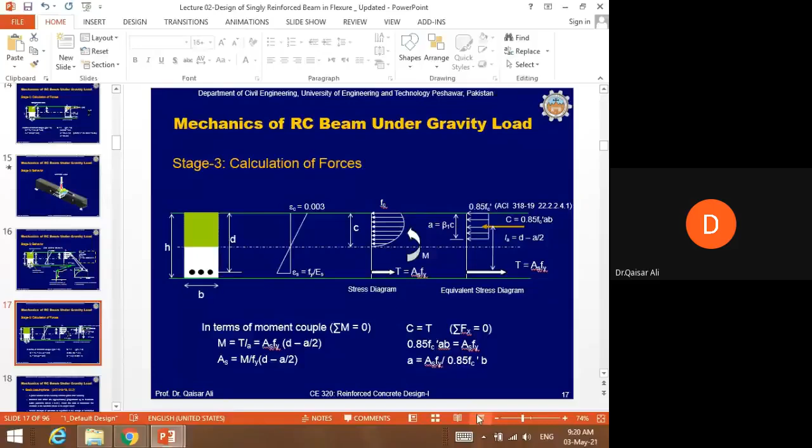the beam will be considered as failed when the strain in the extreme compression fiber reaches a value of 0.003. Do you remember this? We did the derivations on this. Yes, sir.

Okay, before discussing the design corresponding to stage 3, which is basically the strength design approach, we should discuss some basic assumptions involved in the mechanics of reinforced concrete beams. So the first assumption is that a plane section before bending remains plane after bending.

You are familiar with this assumption. When you were deriving the flexure formula in the mechanics course, you studied this assumption. And what does this mean? This assumption means that if we take a section, for example, this is a simply supported beam, and we take a section over here, this section will remain plane even after bending. The beam will bend when a load is applied, but the section will remain plane.

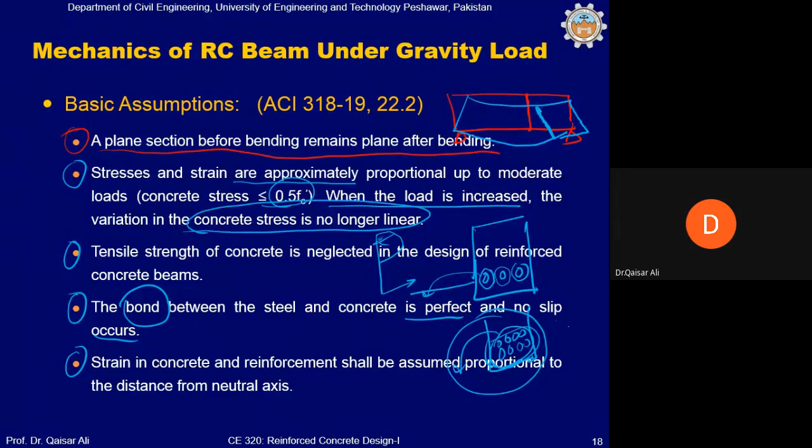Fifth assumption is that strain in concrete and reinforcement shall be assumed proportional to the distance from neutral axis. ये already हम पढ़ चुके हैं. We can see that strain is proportional to the distance from neutral axis. What does it mean? That the strain value will increase as we move away from the neutral axis. Clear? Yes, sir.

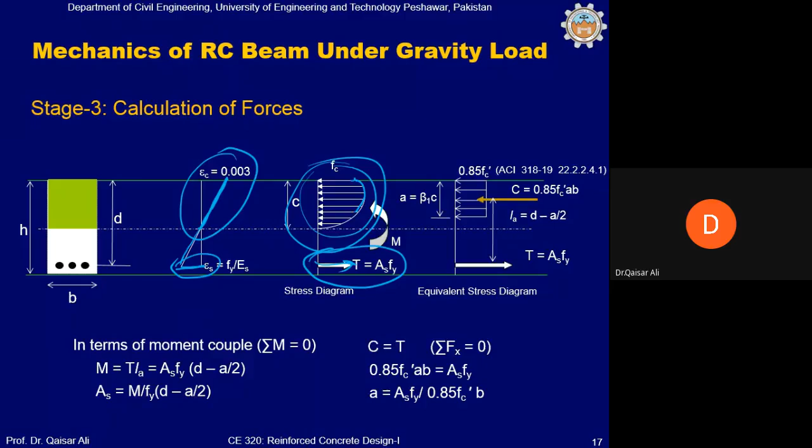और ये assumption तो हम already पढ़ चुके हैं. The maximum usable concrete compressive strain at the extreme fiber is assumed to be 0.003. ये तो बार बार हम पढ़ते हैं. So the maximum concrete strain at which we can consider that the beam is failed is 0.003. This is basically the crushing strain of concrete. So this is clear to you now that the compressive strain value will be fixed. In case of strength design, the crushing strain will always be 0.003. So this value will always be fixed.

Okay. But what about the strain in steel at the time of crushing? What about this value? Now this will depend on the amount of reinforcement. If the amount of reinforcement is relatively small, okay, so then the steel will yield well before the crushing of concrete, and in that case, at the time of crushing, the strain in the tensile steel will be greater than the yield strain. Okay. For example, for this case, the reinforcement amount is denoted by AS1.

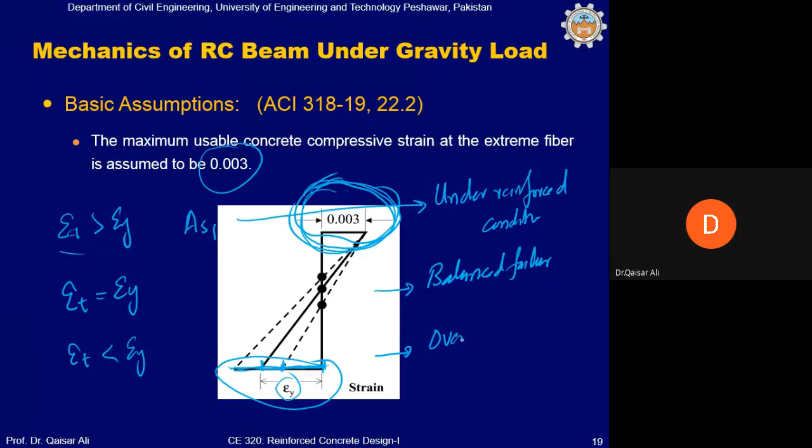If we further increase the amount of reinforcement, then the strain in steel at the time of crushing will be even less than the yield strain, which means that the concrete will crush before yielding of steel. This condition is known as over-reinforced condition, and the section is known as over-reinforced concrete section. अब बात समझ में आ रही है?

For example, the steel corresponding to balanced failure condition is denoted by AS2, and the steel corresponding to over-reinforced concrete section is denoted by AS3. So AS3 will be greater than AS2, and AS2 will be greater than AS1. इस तरह है ना?

अच्छा, अब इसमें अगर आप देखें, these two conditions, that is balanced failure condition and over reinforced condition, will lead to the brittle failure of reinforced concrete beam, because if you see first of all at the balanced failure condition, what will happen? The yielding of steel will occur simultaneously with the crushing of concrete. You will get no warning time, no enough time for escape. So this will be a brittle failure mode, because crushing of concrete is failure, and if the steel just yields at the time of crushing, it will give you no warning signs before the failure.

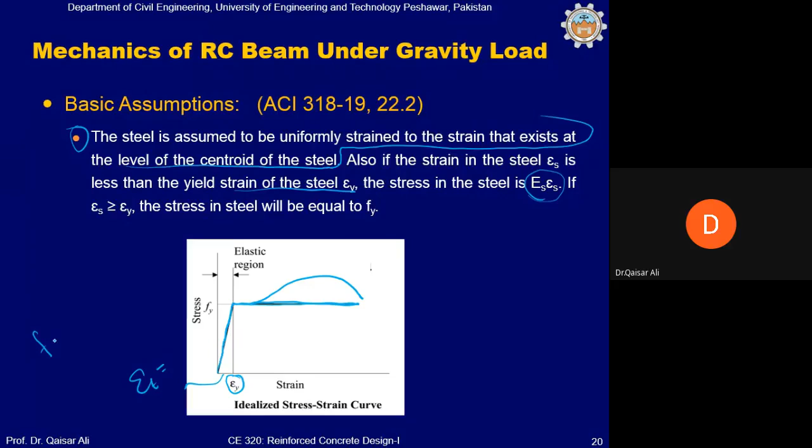This is basically the bilinear elastoplastic curve. You know that actually it will vary like this. This will be the actual stress strain curve. But we can assume the curve as elastoplastic curve, and if the strain in steel is less than the yield strain, you can calculate the stress directly from strain by multiplying this strain with elastic modulus. Clear?

And when the strain in the steel is greater than the yield strain, you can calculate the stress. So the stress in the steel will be directly, you can take it equal to Fy.

बात समझ आ रही है? ये तो ऑलरेडी हम पढ़ चुके हैं ना। Yes, sir.

अच्छा, अब यहां पर आप देखिए जरा, the steel is assumed to be uniformly strained to the strain that exists at the level of centroid. इसका क्या मतलब है? For example, this is a reinforced concrete beam. We have provided 3 bars in the first layer and 2 bars in the second layer. अच्छा, अगर आप strain diagram बनाएं तो the strain diagram will be like this. εc value तो आप लोगों को पता है, this is fixed, it will be 0.003.

Okay. The stress in layer 2 will be fs2, and the strain in layer 2 is εs2, and the strain in layer 1 is denoted by εs1. Clear? अब आप मुझे जरा बताएं, which one will be greater, εs1 or εs2?

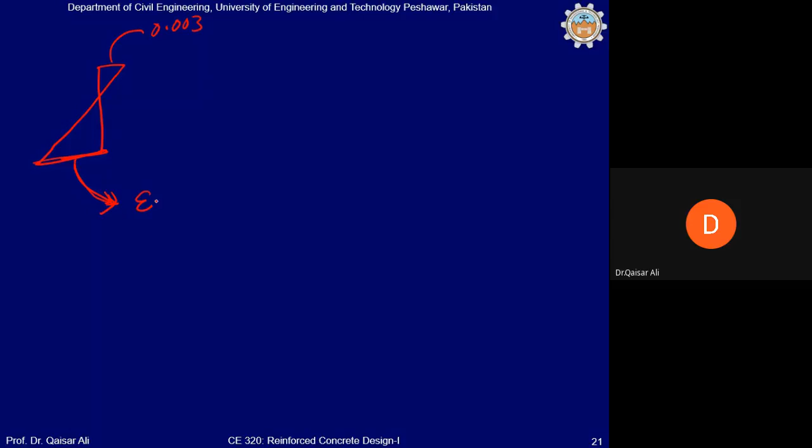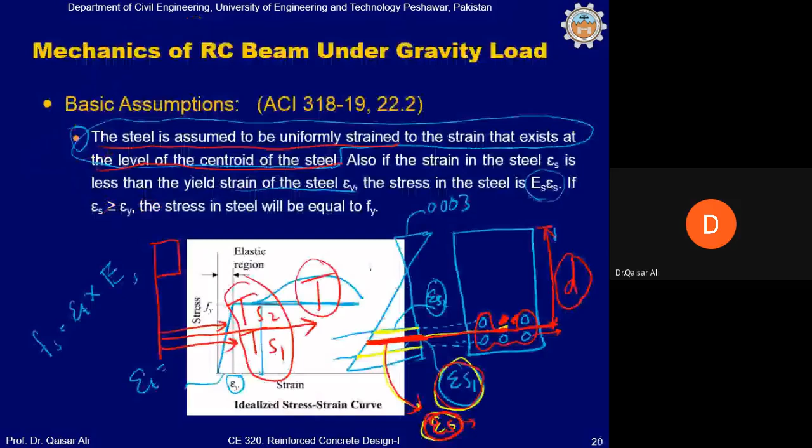And you can also qualitatively you can say that what will be the strain in the steel at the time of crushing. Tensile strain in steel, it will be greater than the yield strain or less than the yield strain. Maybe equal to the yield. Equal to the yield strain. कैसे equal to यार, मैंने तो आपको पहले ही बताया। सर ज्यादा होगा क्योंकि आप देखिए we will always design or reinforce for the under reinforced condition. Yes सर ज्यादा होगा सर. It will be more than the yield strain.

By how much ये हम आगे डिस्कस करेंगे, but this strain for a well designed beam, that is, a beam designed as per ACI code, the strain in the steel will always be greater than the yield strain, because this is the under reinforced condition and this is the design. This section will lead to the ductile failure mode. Okay.

अच्छा, ये कितना होना चाहिए? How much should be the strain in the steel at the time of crushing? So ACI provides a limit on this strain, and corresponding to that strain you can calculate the reinforcement, which will be basically the maximum amount of reinforcement to be provided in a beam. Clear? And you will always provide reinforcement less than the maximum reinforcement.

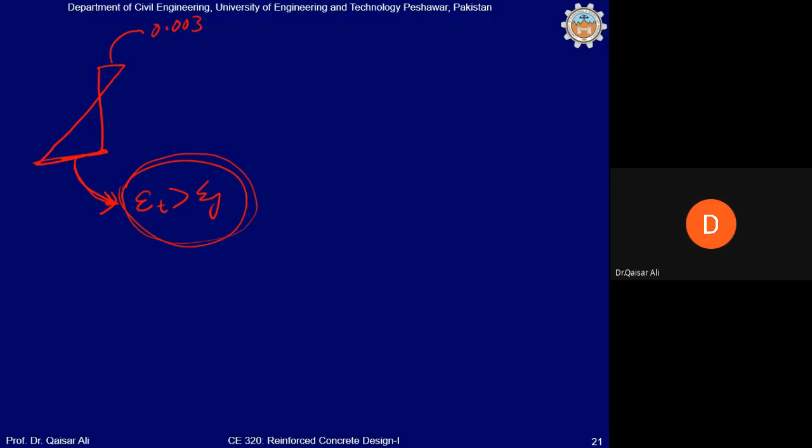So ACI code says that, for example, this is a beam. This is a reinforced concrete beam. This is the strain diagram. This value is fixed. This is 0.003. And what about this value? That is strain in the steel. We qualitatively know that this will be greater than EY for under reinforced condition. This is C. Now, since this strain depends on the amount of reinforcement, is that right? नहीं?

So therefore ACI calculates the maximum reinforcement by limiting the strain in the steel. And code says that this strain at the time of crushing shall be greater than or equal to the yield strain of steel plus 0.003. समझ में आ रही बात? इसका क्या मतलब है? इसका मतलब ये है that at the time of crushing the steel would have yielded and the strain in steel will be more than the yield strain. Clear? By 0.003 it will be greater than the yield strain. बात समझ में आ रही है?

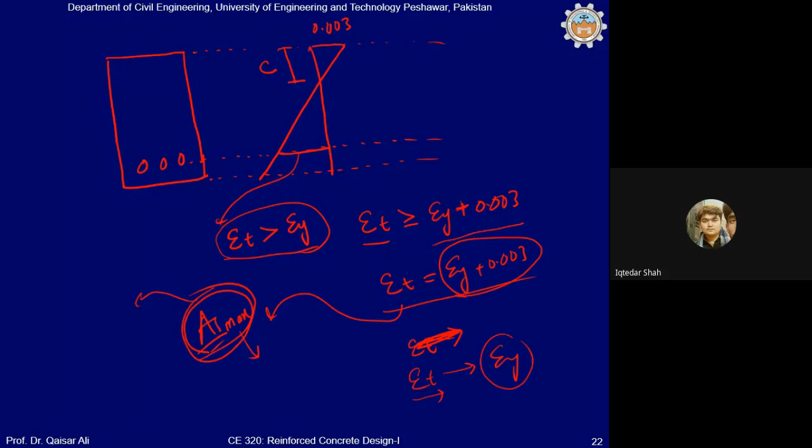तो इसका मतलब ये कि आप रिइंफोर्समेंट बहुत ज़्यादा नहीं बढ़ा सकते, यानी आप रिइंफोर्समेंट बढ़ाएंगे तो आप कैपेसिटी तो ठीक है इंक्रीज होगी, but the failure will be converted from ductile failure mode to the brittle failure mode. So you cannot increase always the capacity by increasing the reinforcement in the beam. अगर आपको ज़्यादा capacity चाहिए, for example, तो you can increase the capacity by increasing the depth of beam. Clear? Yes, sir. ज़रूरी नहीं कि आप reinforcement से ही capacity बढ़ाए, सही?

अच्छा, corresponding to this strain, for example, अगर हम reinforcement कैलकुलेट करना चाहें, that is very simple. This is the stress diagram. This is the compressive force and tensile force. First of all, you will calculate the C value, the small c value, which is the depth of neutral axis. So you can calculate that very easily from similarity of triangle. It will be equal to 0.003 divided by C.

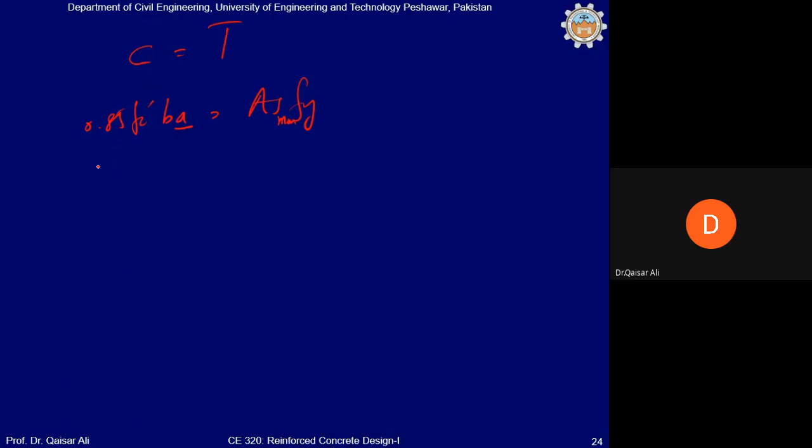0.85 f'c β1 into 0.34d, it will be equal to As max into Fy. This is corresponding to grade 40. Clear? अच्छा, अब इसको जरा कैलकुलेट करें. As max will be equal to, इन दोनों को आप मल्टीप्लाई करें और मुझे वैल्यू बताएं. 0.34 मल्टीप्लाई बाय 0.85, 0.29.

So almost equal to 0.3 into f'c divided by Fy into bd. So this is the maximum amount of reinforcement which is allowed in a reinforced concrete beam for grade 40 steel. Clear?

क्लियर? अच्छा, अगर हम यहाँ पर ग्रेड 60 की करस्पॉन्डिंग अगर हम कैलकुलेट करें, तो यहाँ पर फिर हम ये पुट करेंगे 0.31d. यहाँ पर हमने कैलकुलेट किया है, it is 0.31d. तो यहाँ पर हम 0.31d अगर हम पुट करें, तो As max will be equal to, ये जरा मुझे बताएं, 0.31 मल्टीप्लाइड बाय 0.85, 0.26. 0.27 almost into f'c divided by Fy into bd. This is the maximum reinforcement corresponding to grade 40, and this is maximum reinforcement for grade 60 steel.

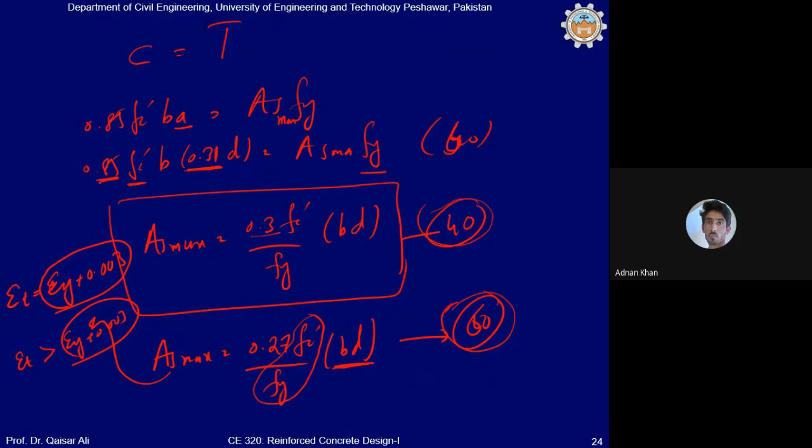एक्सक्यूज मी सर। जी जी सर ये तो मैक्सिमम लिमिट है ना, और मिनिमम लिमिट कितना होगा? मिनिमम लिमिट की तरफ आते हैं ना, पहले ये तो समझ गए ना, जी सर, दैट्स क्लियर। जो हम कर रहे हैं उस पर ज्यादा फोकस करें ना, जो आगे हम करेंगे ना, what will be the minimum reinforcement. अगर ये समझ गए कि नहीं? Yes, sir. समझ गया। Clear.

So for specified material properties and for a given section of beam, you can calculate the maximum amount of reinforcement. अच्छा, इससे आप reinforcement ratio भी calculate कर सकते हैं, और वो किस तरह, यानी आप इस bd पर इसको डिवाइड करें। यहाँ पर जरा देखें, this is As max is equal to 0.27 f'c divided by Fy into bd. क्लियर? अच्छा, इसको अगर हम दोनों साइड्स को bd पर डिवाइड करें तो ये तो कैंसिल हो जाएगा.

This is known as reinforcement ratio. This is basically the area of reinforcement, area of steel divided by effective area of concrete. This is denoted by rho. So area of steel divided by effective area of concrete, this is known as rho. It is basically reinforcement ratio. And maximum reinforcement divided by bd, it will be denoted by rho max, and it will be equal to 0.27 f'c divided by Fy.

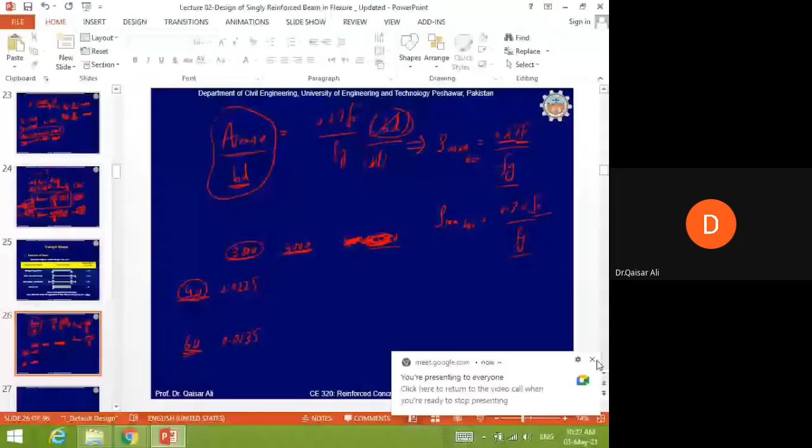आप लोगों को आवाज आ रही है? यस सर अभी आ रही है। ओके, तो आप इसी तरीके से एक टेबल बना सकते हैं और स्क्रीन नजर आ रही है कि नहीं? नो सर, नहीं आ रही सर। अच्छा, मैं दोबारा शेयर कर देता हूँ। नहीं सर विजिबल है सर। अब मेरे ख्याल में अभी इसमें कोई मसला है। सर 10 मिनट का ब्रेक लेते हैं। बस ये कंक्लूड करते हैं, फिर ब्रेक करते हैं। अभी स्लाइड आपको नजर आ रही है कि नहीं? यस सर।

Can you see the slides? अच्छा, इसी तरीके से आप ग्रेड 40 स्टील और 3000 PSI करस्पॉन्डिंग भी रिइंफोर्समेंट रेशो कैलकुलेट कर सकते हैं। मुझे क्विकली बताएं। 0.3 मल्टीप्लाइड बाय 3 डिवाइड बाय 40, what will be the value? 0.0225. And what about for grade 60 and 3000 PSI? 0.0135. तो इसका मतलब ये है at least you should remember these two values because frequently we will be using

3000 PSI and grade 40 or 60 steel in the design of beams. So you should at least remember these values. This is basically 2.25% of the, अगर आप इससे मैक्सिमम reinforcement कैलकुलेट करना चाहते हैं तो you have to multiply this value with BD. क्योंकि ये रेशो है ना। तो 2.25% of BD.

So you cannot provide more than 2.25% of the effective area of concrete beam for grade 40 steel. अगर इसको आप grade 60 के लिए करें तो it is coming 1.35% of the effective area of concrete beam. Clear? At least you should remember these values. For grade 40 steel, 3000 PSI concrete, you cannot put reinforcement more than 2.25% of the effective area. And for grade 60 steel, this limit is 1.35%. क्लियर?

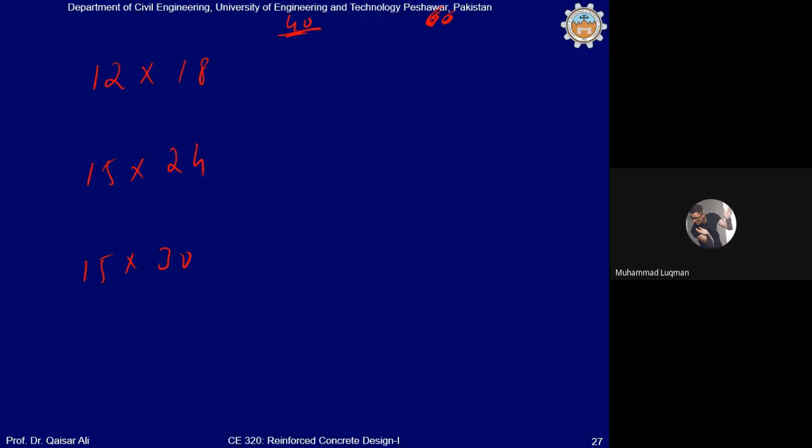सर बस इस एरिया को उस परसेंटेज के साथ मल्टीप्लाई कर लेंगे, 2.25 या 1.35। इस एरिया के साथ नहीं मल्टीप्लाई करेंगे ना यार, b और d के साथ, यानी इफेक्टिव एरिया। इफेक्टिव डेप्थ यूज करेंगे। हाँ, तो फॉर ग्रेड 40 इट विल बी इक्वल टू 0.0225 मल्टीप्लाइड बाई 12 मल्टीप्लाइड बाई 18 माइनस 2.5, तो इट विल बी इक्वल टू 15.5। क्लियर?

और इसी तरह ग्रेड 60 के लिए आप कैलकुलेट कर सकते हैं: 0.0135 मल्टीप्लाइड बाई 12 मल्टीप्लाइड बाई 15.5। बात समझ आ रही है? तो इसी तरीके से हर एक डिफरेंट साइज ऑफ बीम्स के लिए आप मैक्सिमम रिइंफोर्समेंट करस्पॉन्डिंग टू ग्रेड 40 एंड 60 कैलकुलेट कर सकते हैं। ये पॉइंट समझ गए कि नहीं? यस सर।

तो ये जो मैक्सिमम रिइंफोर्समेंट की लिमिट है बाय एसीआई कोड, ये बेसिकली किसके लिए? दिस इज डक्टिलिटी रिक्वायरमेंट। क्लियर? If you provide less than the maximum reinforcement, so it will ensure a ductile failure mode.

It will ensure that the failure mode will be ductile. Clear? Because the steel would have yielded well before crushing when the reinforcement provided in the beam is less than the maximum reinforcement. Clear?

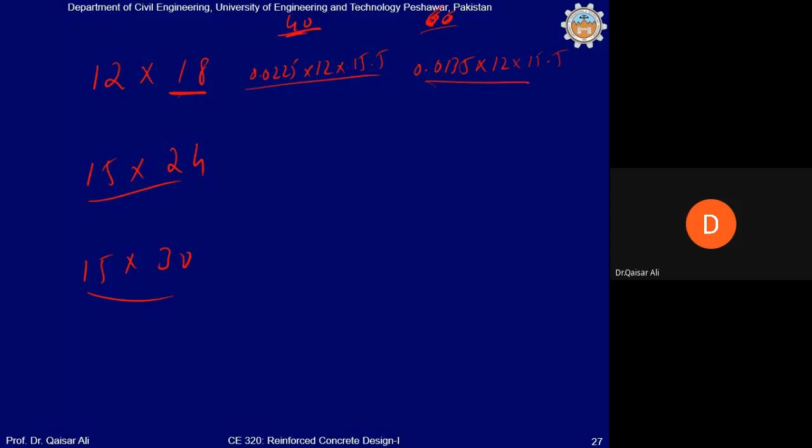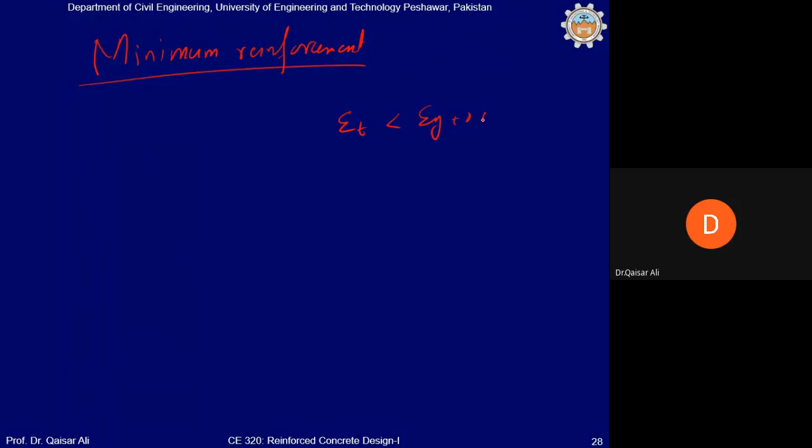Acha. There is also another requirement of ACI code, another limit, which is the minimum reinforcement limit. The more we increase the reinforcement, you know that the strain will become less than εy plus 0.003. The less reinforcement we provide, the more ductile the failure will be, because the strain value of the tensile reinforcement at the time of crushing will be greater the more we reduce the reinforcement.

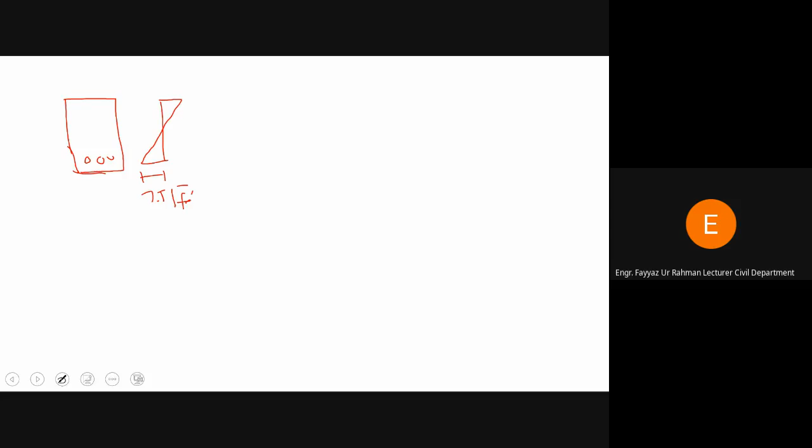Okay, so we already started that why we provide the minimum reinforcement in a beam. So this is the stress diagram just before the cracking of concrete. You know this value will be equal to 7.5 under root fc prime. Okay, so the average stress multiplied by the area on which these stresses are acting will give you the tensile force resisted by the concrete. It will be equal to 7.5 under root fc prime into BH divided by 4. Is this clear?

Is it clear up to here? Yes sir. Okay, now you also read in the assumptions that we assume that just after the cracking all the tensile stresses will be resisted by the steel. There will be no contribution of concrete in resisting the tensile stresses. In other words, we will ignore completely the tensile strength of concrete. Clear? Just after the cracking. Is it clear up to here or not?

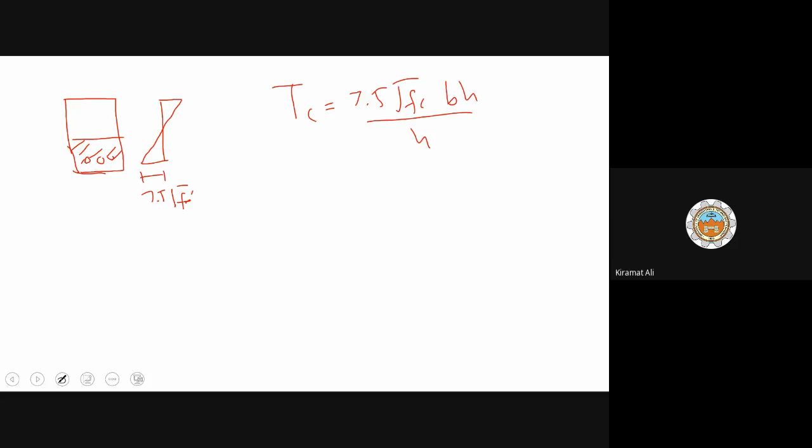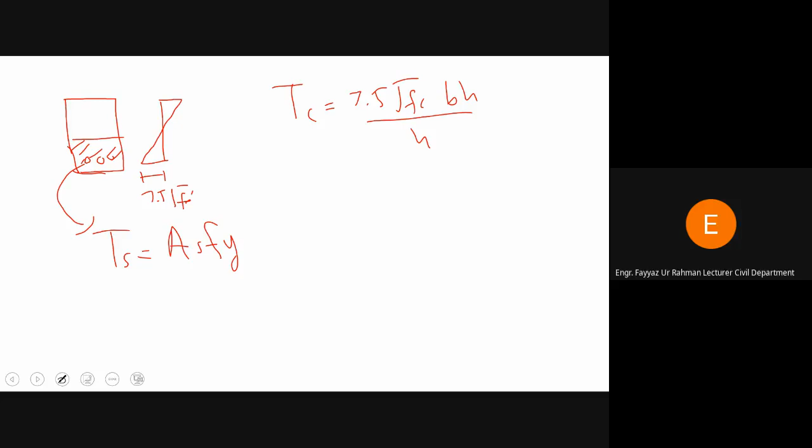Yes sir. Okay, so for the reinforcement that you have provided here, if we calculate its capacity, it will be equal to area of steel multiplied by the yield strength of the steel. Clear up to here? Now you know that after the cracking this tensile force will be resisted by the steel. Now clear? So if we equate these two, As fy must be at least equal to 7.5 under root fc prime BH divided by 4.

Okay. Now if this is equal to this one, this will basically be your minimum reinforcement, the minimum reinforcement required to resist this force. And this much reinforcement should be there at the least, so that after the crack it can resist this much force which was there in the concrete before the cracking. Is this clear? Please respond. Yes sir.

Now let's calculate this. As minimum will be equal to 7.5 under root fc prime BH divided by 4 fy. 7.5 divided by 4, tell me this value. 1.875. So As minimum will be equal to 1.875 into under root fc prime divided by fy into BH. If we replace this H with the effective depth d, because in reinforced concrete design we will always use the effective depth, since H is always greater than the effective depth, you can take it equal to 1.25 d. So put this here.

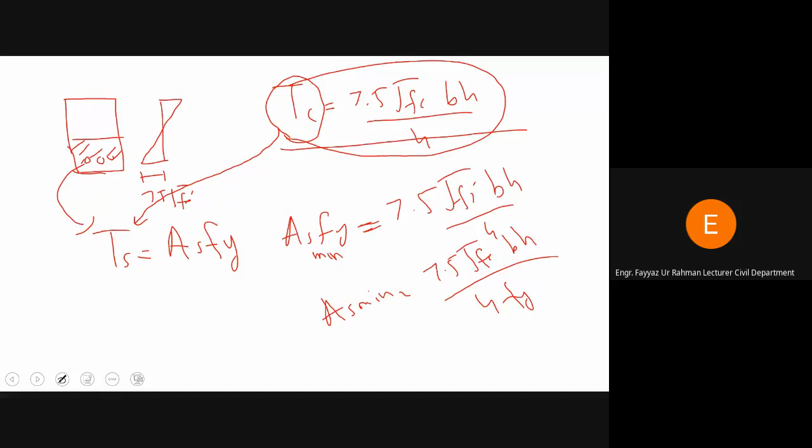Yes, sir. So this is how minimum reinforcement is calculated. But code says that as per code the minimum reinforcement will be 3 under root fc prime, which we have developed, divided by fy, and this must be greater than or equal to, there is another limit, 200 divided by fy into bd. क्लियर? इसका क्या मतलब है? इसका मतलब ये कि आप ये दोनों वैल्यूज कैलकुलेट करेंगे, whichever is greater that will be your minimum reinforcement.

अब बात समझ में आ रही है? Yes, sir. तो मिनिमम reinforcement रेशियो भी इसी तरीके से आप कैलकुलेट कर सकते हैं. ये दोनों अगर आप बीडी पर डिवाइड करें दोनों साइड्स, so this will give you the minimum reinforcement ratio, and minimum reinforcement ratio will be equal to 3 under root fc prime divided by fy greater or equal to 200 divided by fy. For different concrete strength and grade of steel, you can calculate the minimum reinforcement ratios. Clear?

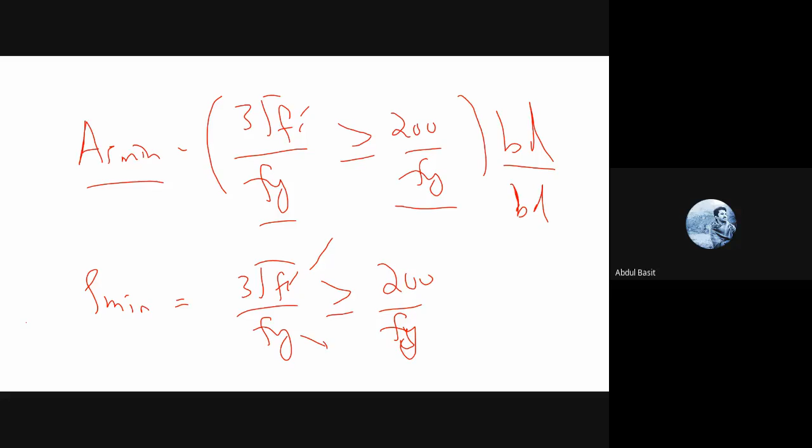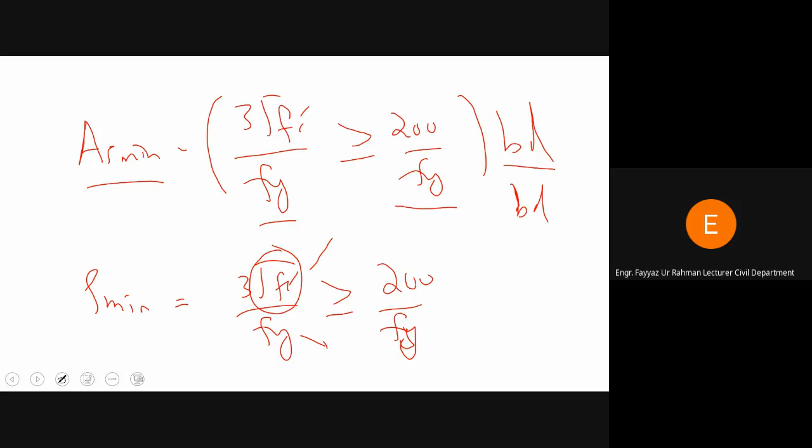ये आप लोग तो मैथ्स में काफी कमजोर है यार. सिंपल कैलकुलेशंस आप नहीं कर सकते. मैं आप लोगों को बार बार बता रहा हूं कि व्हेनेवर एफसी प्राइम कम्स इन स्क्वायर रूट, तो फिर आपकी यूनिट्स क्या होगी? PSI सर, हमने PSI में. तो ये आप PSI में पुट करें ना यार. ये भी PSI में पुट करें, FY भी PSI में पुट करें. इसी तरीके से यहाँ पर भी आप ये PSI में पुट करें. सही?

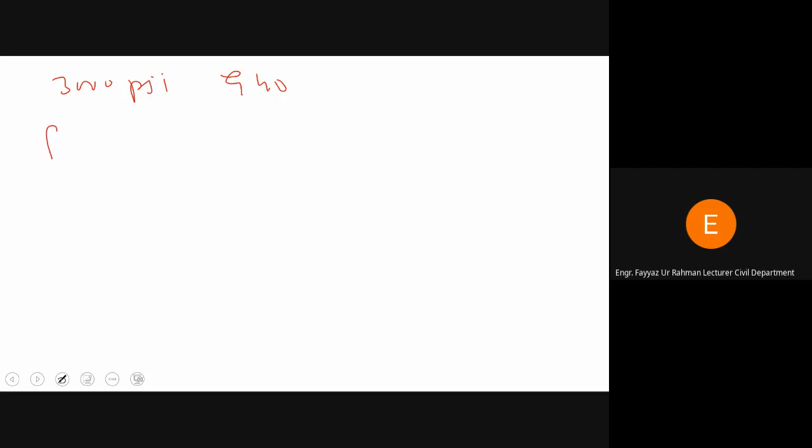अब वैल्यू बताए शाबाश, क्विकली. 4.108. इतने आसान कैलकुलेशंस आप नहीं कर सकते यार। 4.1 into e power minus 3 सर यही आ रहा है। ये आप इस तरह बताए ना 4.1, तो आप पूरी वैल्यू बताए ना, ये 0.00 क्या आता है? 0.0041 ये corresponding to this equation सर. 0.0041, and what about this equation? 0.005. 0.005. Okay, so minimum will be 0.005 which one will be governing? 0.005.

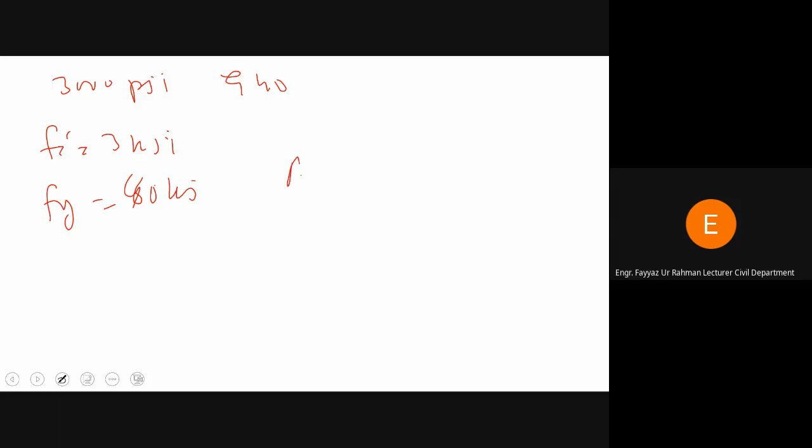तो इसका मतलब ये कि 3000 psi for fc prime is equal to 3 ksi and fy is equal to 40 ksi. The minimum reinforcement ratio will be basically 0.5% of the effective area. 0.5% means 0.005 into BD. इस तरह है ना?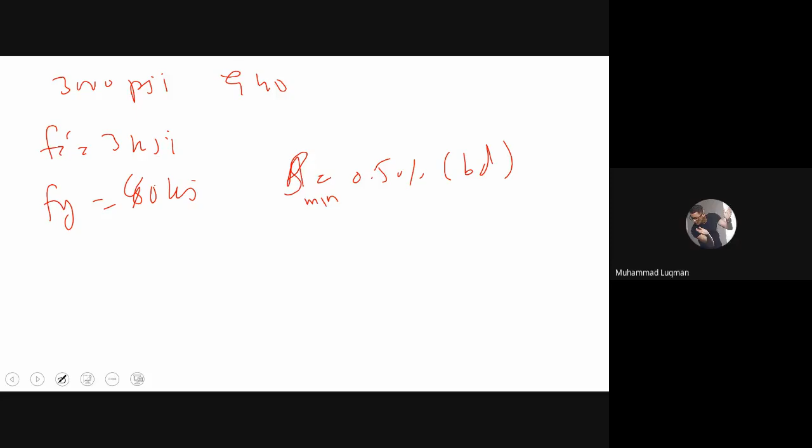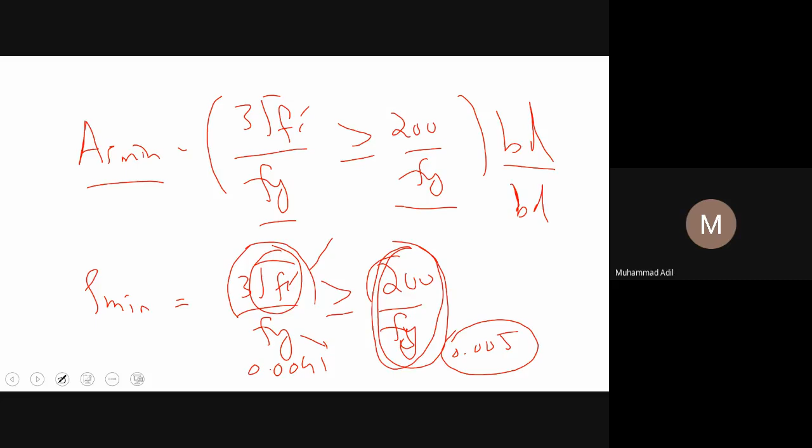Yes, sir. इसी तरीके से आप 3000 psi और ग्रेड 60 करस्पॉन्डिंग भी कैलकुलेट कर सकते हैं। ये जरा बताएं शाबाश। इसमें भी यही इक्वेशन गवर्न करेगा और ये मैंने आपको लास्ट क्लास में बताया था। Why this equation will govern? ये आप सर फर्स्ट वन से 0.0027 और दूसरे से 0.0033 तो कौन सा गवर्न कर रहा है? सर द सेकंड वन, सेकंड वन। तो ये ऑलमोस्ट 0.33% ऑफ BD।

So you should at least remember these values. For 3 KSI and grade 40 steel, the minimum reinforcement is 0.5% of BD, and the minimum reinforcement for grade 60 is 0.33% of BD. Clear? यस सर और ये मैंने आप लोगों को ऑलरेडी बताया था कि up to 4500 psi always this second equation will govern. और ये किस तरह आप कैलकुलेट कर सकते हैं?

आप ये दोनों इक्वेट करें, 3 under root fc prime is equal to 200, इससे आप fc prime की वैल्यू कैलकुलेट कर सकते हैं। आपके पास ऑलमोस्ट 4500 psi आएगा। क्लियर? इसका क्या मतलब है?

इसका मतलब ये है कि if the concrete strength is less than 4500 psi, then equation 2, 200 divided by fy, will govern. And if the concrete strength is greater than 4500 psi, then equation 1, that is 3 under root fc prime divided by fy, will govern. But since we are always using concrete strength less than 4500 psi in beams, always the second equation will govern. Academic purpose के लिए तो आप दोनों कैलकुलेट करेंगे, यानी अगर आप एग्जाम में क्वेश्चन हल करते हैं, बट ये आपको मालूम होना चाहिए कि this second one will basically give you

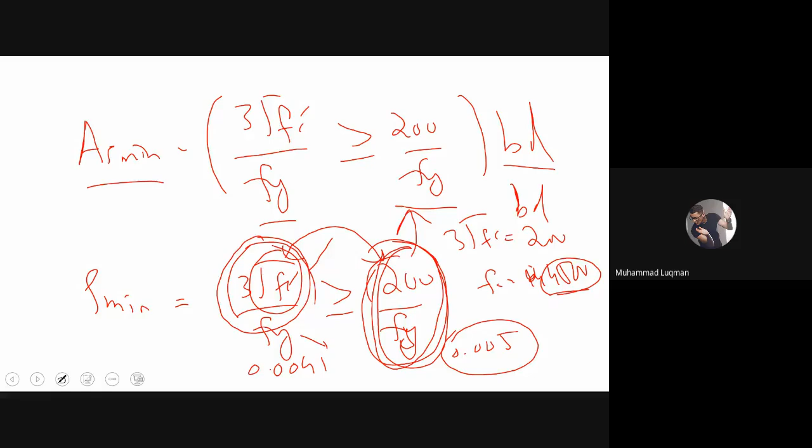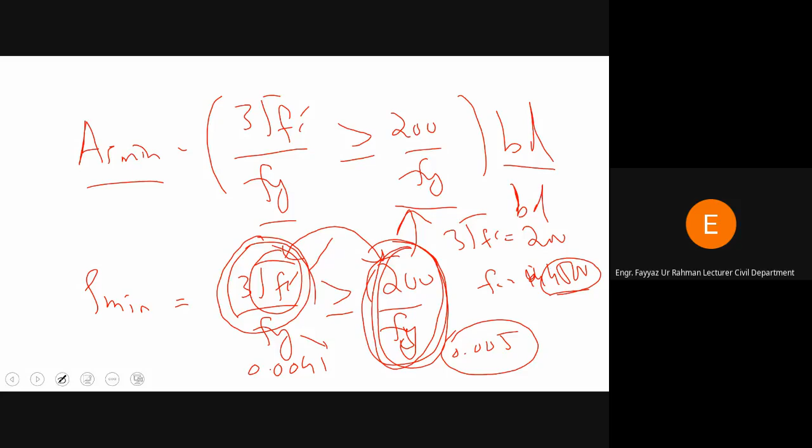this will give you the minimum reinforcement. Clear? Sir means maximum of both equations. हाँ बिल्कुल, maximum of these two will give you the minimum reinforcement.

तो फाइनली आप लोगों को कम से कम ये वैल्यूज याद होने चाहिए। बाकी तो आपके पास इक्वेशंस हैं, मगर कम से कम ये वैल्यूज आपको याद होने चाहिए that for grade 40 steel, for concrete strength of 3000 psi, fc prime is equal to 3 ksi, for grade 40, the minimum reinforcement will be 0.5% of BD and maximum reinforcement is 2.25% of BD.

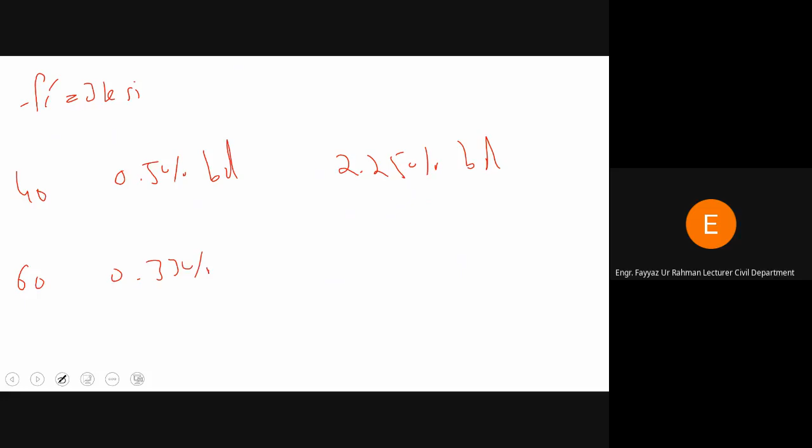इसी तरीके से grade 60 के लिए minimum reinforcement will be 0.33% of BD and maximum reinforcement is, it was how much? Do you remember? आवाज आ रही है? Sir, 1.35%. 1.35% of BD.

तो बाकी इक्वेशंस तो आप लोगों को पता है, आप उससे कैलकुलेट कर सकते हैं, मगर ये आप लोगों को कम से कम याद होने चाहिए, बिकॉज वी विल बी फ्रीक्वेंटली यूजिंग concrete strength of 3 ksi and grade 40 or 60 steel in the design of beams. Clear? चलो एक ब्रेक करते हैं, फिर after the break we will solve a design example on this. Clear?

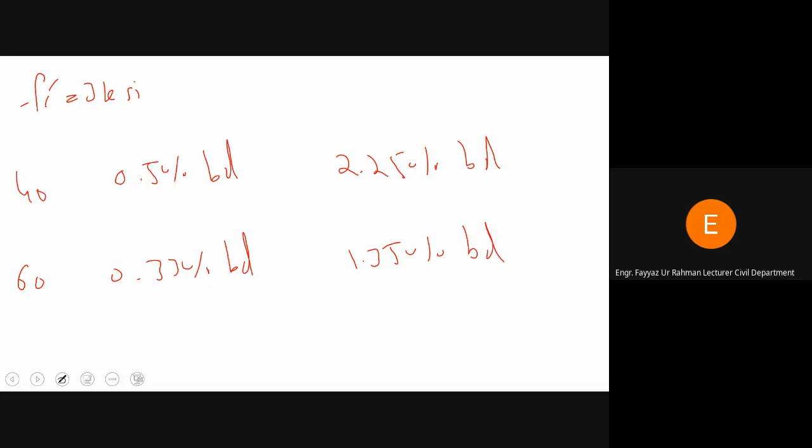Okay, ओके sir. 15 मिनट्स का ब्रेक करते हैं, सही? Okay, sir. आदिल भाई ये ग्रेड 60 के लिए मैक्सिमम रेनफोर्समेंट कितने परसेंट है? 1.35%। यस

Can you see the slides? Yes, sir. Okay, I think we should start the lecture. So we will solve the same design example using the strength design approach.

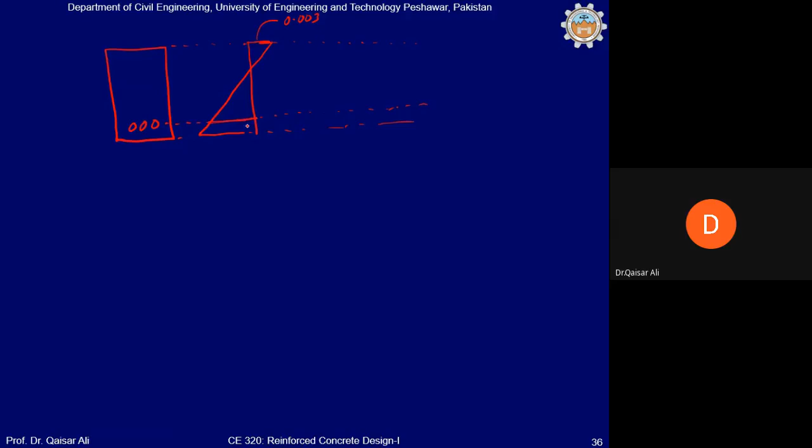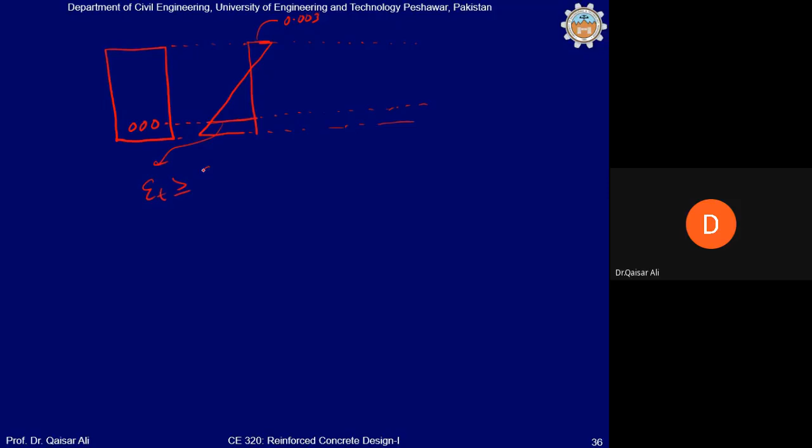This is a reinforced concrete section. In the strength design approach, you know that the compressive strain in the extreme compression fiber will be 0.003. And strain in steel will be greater or equal to εy plus 0.003. It will depend on the demand. If we draw the stress diagram, it will be like this. Because we know that the steel would have already yielded at this stage, so we know the value of Fy.

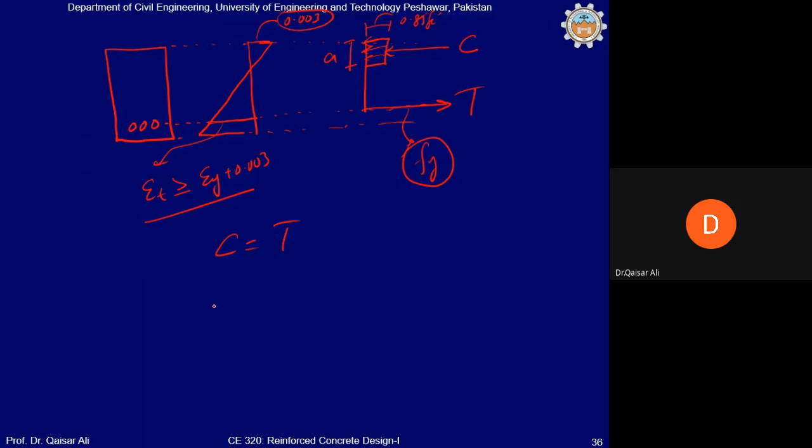So at the ultimate stage, you know the strain in the compression fiber, which is 0.003, and the stress in the steel is also known to you, which is Fy. The compressive force you can calculate from the compression block depth. The stresses are uniform, 0.85 Fc prime, and depth of the compression block is denoted by a. So this we have already studied that from equilibrium C will be equal to T. C is equal to 0.85 Fc prime b a and T is equal to As Fy.

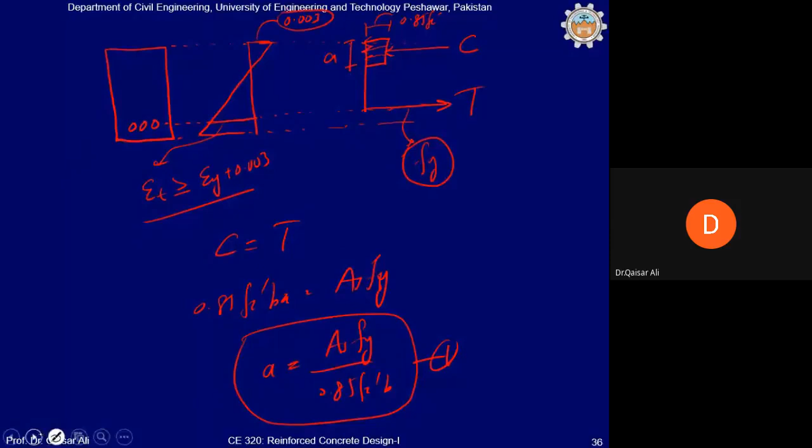And from this we have developed a relation for the compression block depth, which was equal to a = As Fy divided by 0.85 Fc prime times b. This is how you can calculate the depth of compression block for a given size of beam with given reinforcement. Okay.

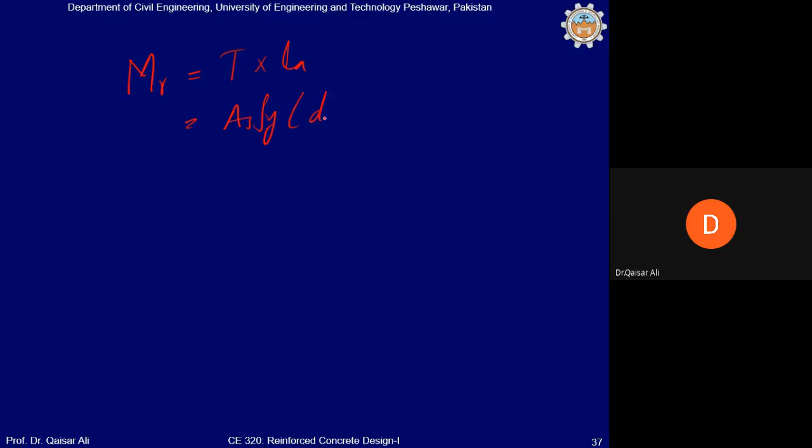Then we also calculated the flexure capacity at this stage, which was equal to T multiplied by lever arm, which was equal to As Fy, and lever arm is equal to d minus a by 2. Now in strength design approach, this MR is denoted by Mn, which is basically nominal capacity of a reinforced concrete beam, which is based on the specified material properties. Clear? So this nominal capacity is equal to As Fy into d minus a by 2.

But since you know that in case of strength design approach, we have studied in lecture 1 that the demand will be amplified, that is the load will be multiplied with corresponding load factors, and the capacities will be reduced. So this nominal capacity will be reduced by strength reduction factor, that is phi Mn. And this phi Mn is basically the design flexure capacity. If we multiply this Mn with the strength reduction factor phi, then it becomes the design flexure capacity. Okay.

Now, to avoid failure, the capacity shall be greater than or equal to the demand, and the demand you can calculate from the analysis. For a given load, you can calculate very easily the demand moment from the moment diagram. But for calculation purpose, you can take this phi Mn equal to Mu. Why? Because the factor of safety has already been incorporated in this equation.

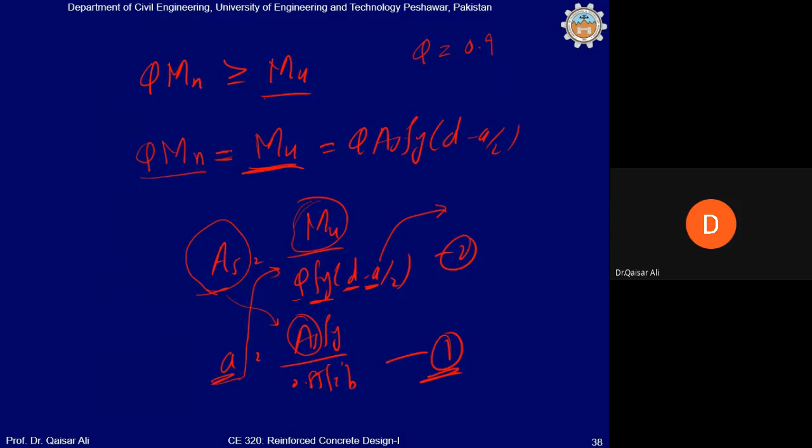We have already discussed this, clear? Yes, sir.

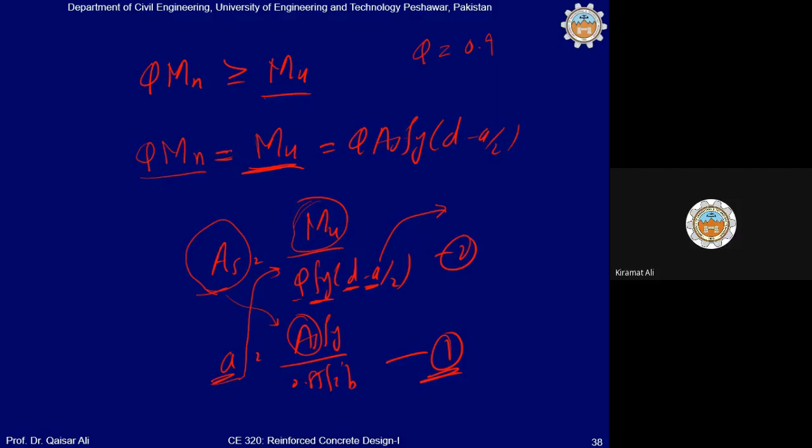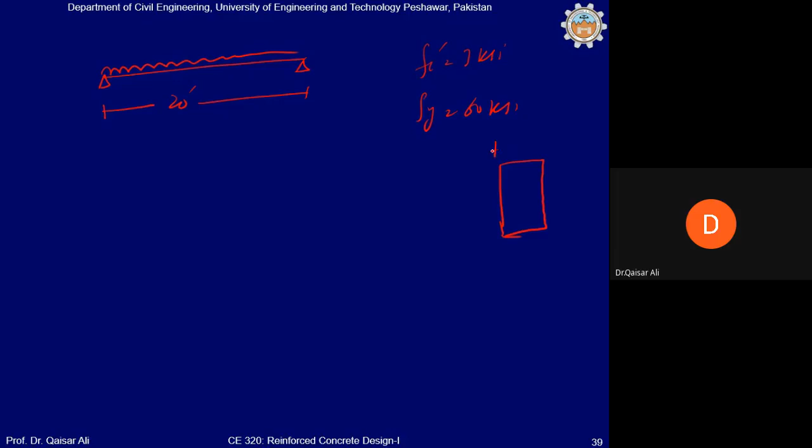Okay, now we come to the design example. If you remember, this was a simply supported beam. The span length is 20 feet. f'c is 3 ksi and fy is 60 ksi. You can assume the beam size. If you remember our working stress approach, we assumed that the size of beam is 12 inch by 18 inch. However, you can select the size of beam, especially the depth of beam, from the ACI table.

Calculate this quickly, well done. 15, sir. 15 inches. But since this is the minimum value, you can provide a depth greater than this, but you will never provide a beam depth less than this value. Clear? That is why we selected the beam size equal to 12 by 18 inch. Is this understood now?

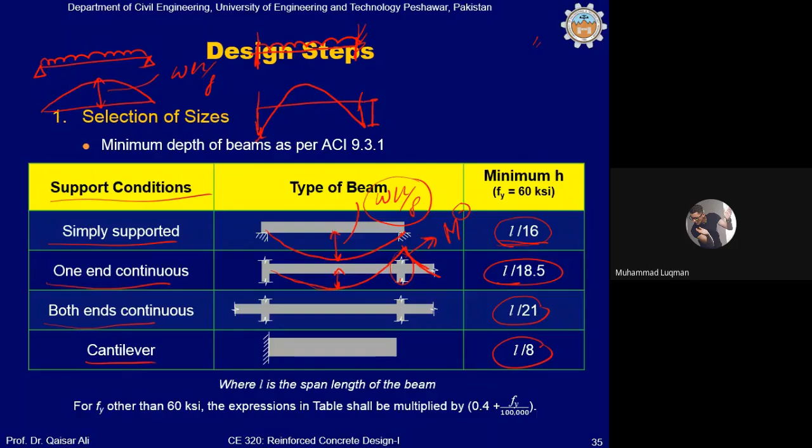ये मोमेंट कितना होगा? नेगेटिव मोमेंट फॉर फिक्स सपोर्टेड बीम सब्जेक्टेड टू यूनिफॉर्मली डिस्ट्रीब्यूटेड लोडिंग. Sir, WL square divided by 4. WL square by 12. Okay. Yes, sir.

But this total moment will remain the same. It is just distributed between positive and negative moment. This total moment will remain the same. It will be WL square by 8. If you subtract WL square by 12 from WL square by 8, you will get the positive moment at the center of fixed supported beam. ये अगर आप कैलकुलेट करें, so it will be, I think, WL square by 24.

अब बात समझ आ रही कि नहीं? तो total moment will remain same. It will be WL square by 8. It will be just distributed between negative and positive moments. तो यहाँ पर अगर आप देखें तो

for simply supported beam, the maximum moment will be WL square by 8. For one end continuous, of course, negative moment will be produced at the support. So this will be divided between negative and positive moment. So this value will be reduced. तो आप देख सकते हैं, you can also reduce the depth correspondingly. यहाँ पर L by 16 है और यहाँ पर L by 18.5 है. ये पॉइंट अब समझ में आ रही है? यस सर।

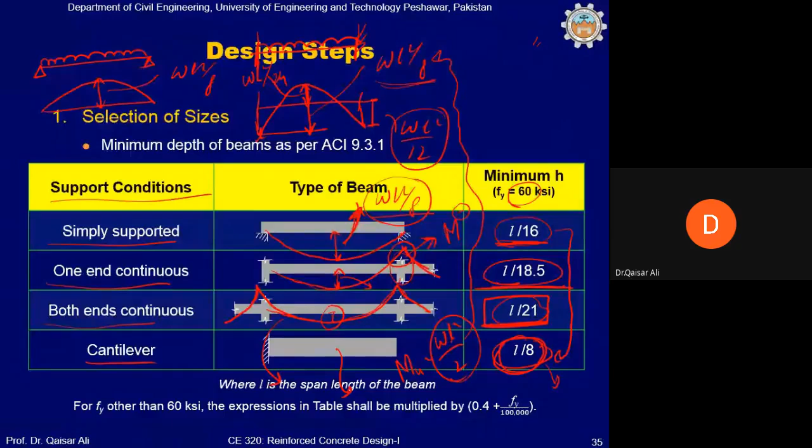तो Yes, sir. Using the ACI table, you can calculate the minimum depth of beam. But remember, this table is applicable for normal weight concrete and grade 60 steel. This is developed basically for normal weight concrete and the grade of steel is 60. Clear? For any other grade of steel or for lightweight concrete, you will apply modification factor to these equations. Clear? Yes, sir.

For example, for any other grade of steel, you will multiply these values with this factor: 0.4 plus Fy divided by 100,000, where Fy will be in psi. For example, if you are using grade 40 steel, so what will be this factor? 0.4 plus 40,000 divided by 100,000. So it will be equal to 0.4 plus 0.4. So you have to multiply all these values with 0.8 for grade 40 steel. ये बात क्लियर है? So for any other grade of steel, you will basically modify these equations by this factor.

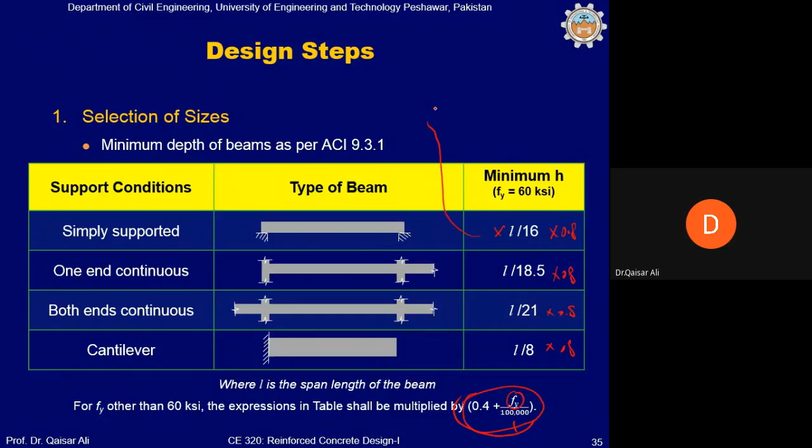Similarly, for lightweight concrete, you can modify this equation by multiplying this equation with a lightweight factor, which is basically 1.65 minus 0.005 into weight of concrete, or 1.09, whichever is greater. ये WC क्या है? This is basically unit weight of concrete. So normally the unit weight of concrete is 150. For plain concrete, it is 145. But for lightweight concrete, this will be less than 145. For example, WC is 100 pound per foot cube.

तो उस केस में फिर आप यहाँ पर ये पुट करेंगे, तो it will be equal to 1.65 minus 0.5, 1.15. तो ये 1.15 आप इसके साथ मल्टीप्लाई करेंगे. बात समझ में आ रही है? एंड रिजल्ट इसका क्या होगा? दिस द डिप्थ विल बी इंक्रीज्ड बेसिकली.

अगर बहुत ज्यादा लाइट वेट कंक्रीट नहीं है, like for example if the unit weight of concrete is more than 115 pounds per foot cube, फिर उसके लिए इस मॉडिफिकेशन फैक्टर की कोई जरूरत नहीं है, because it will give you a value closer to 1. So this table is basically developed for grade 60 steel, for normal weight concrete and grade 60 steel. For lightweight concrete or for any other grade of steel, you will basically modify these equations with corresponding modification factors. Clear?

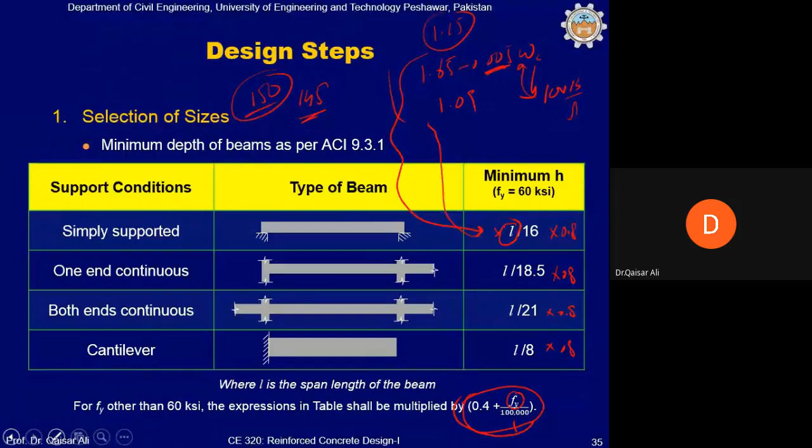अच्छा, अब दोबारा यहाँ पर आते हैं. The minimum depth required from ACI table is 15 inches, so I can choose greater than that depth. So in my case, it is 12 by 18 inches. Clear? And if you remember, the dead load was equal to 1.5 kip per foot, and the live load is equal to 0.5 kip per foot. And we are assuming that this load also contains the self weight of the beam.

अगर आपको given हो that the self weight is not included, तो फिर आपने इसके साथ ही self weight भी include करनी है, because self weight is also a dead load. तो किस तरह आप कैलकुलेट करेंगे? Very simple. Area of the cross section 12 by 18, और इसको कन्वर्ट करें फुट स्क्वायर में, तो डिवाइड बाई 144 एंड मल्टीप्लाई बाई यूनिट वेट विच इज 0.15. So from this you can calculate the self weight of the beam. You will basically add this with the dead load.

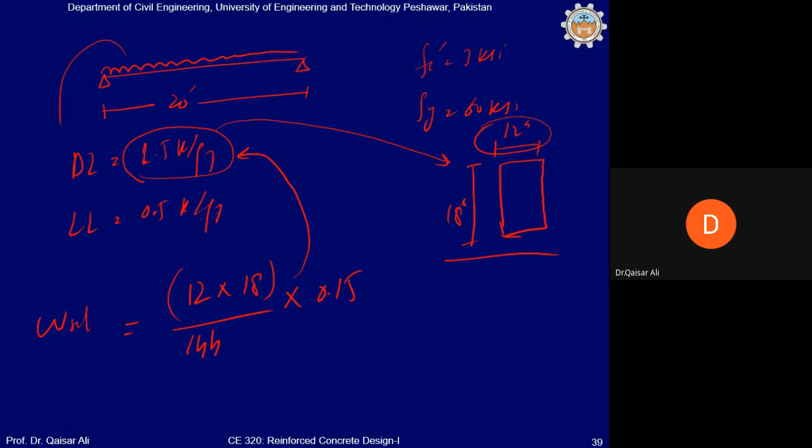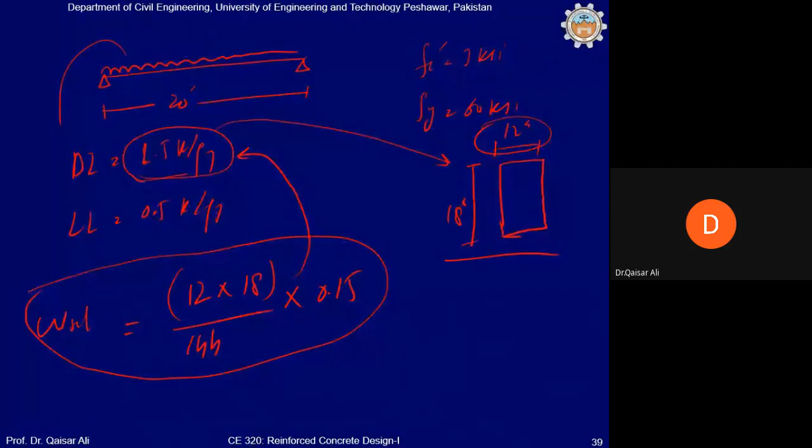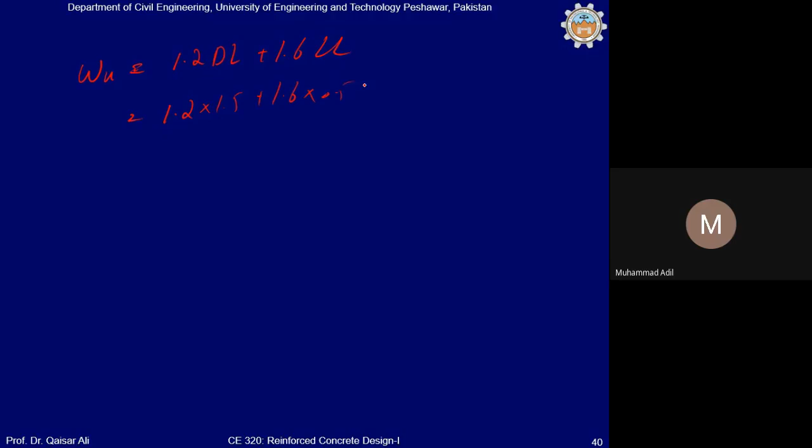Okay, यहाँ तक समझ में आ रही है? मगर इस प्रॉब्लम के लिए हम एज्यूम कर रहे हैं that this self weight is already included in this value. Clear? अच्छा, अब हम स्ट्रेन्थ डिजाइन अप्रोच यूज करेंगे. तो फर्स्ट ऑफ ऑल you will calculate the ultimate load or factored load. It will be equal to 1.2 into dead load plus 1.6 into live load. तो ये वैल्यू जरा क्विकली मुझे बताएं. 2.6 sir. It is coming 2.6 kip per foot.

Now maximum moment for simply supported beam is equal to Wu L square by 8. तो ये जरा कैलकुलेट करें शाबाश. 2.6 multiplied by 20 square divided by 8. जल्दी करें शाबाश. 130. 130 sir. 130 kip-foot. And if you convert this into inch-kip, it will be equal to 1560 inch-kip. इस तरह है. Yes, sir.

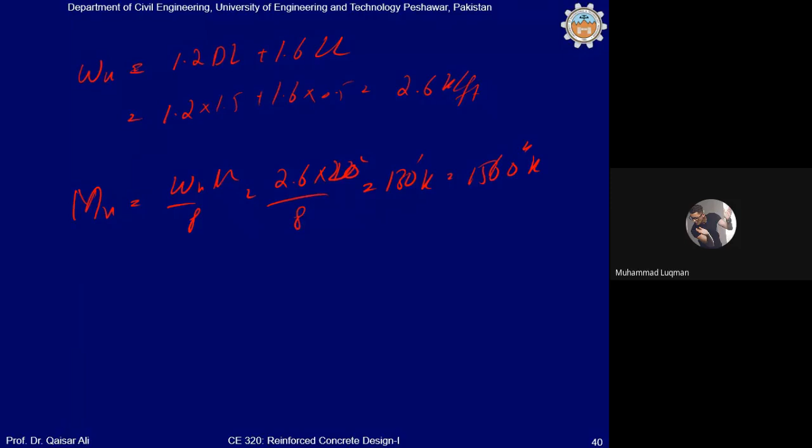Now using these two equations: a is equal to As Fy divided by 0.85 fc prime b, and As is equal to Mu divided by phi Fy into d minus a by 2. Okay. First of all, you will assume the value of a, which can be assumed as 0.2d. So 0.2 multiplied by d, which is 15.5, is how much? 3.1. 3.1 sir.

So to get the value of As, यहाँ पर पुट करें और मुझे As की वैल्यू बताएं शाबाश क्विकली. Mu is 1560, phi is 0.9, Fy is 60, d is 15.5 और इसमें 3.1 पुट करें.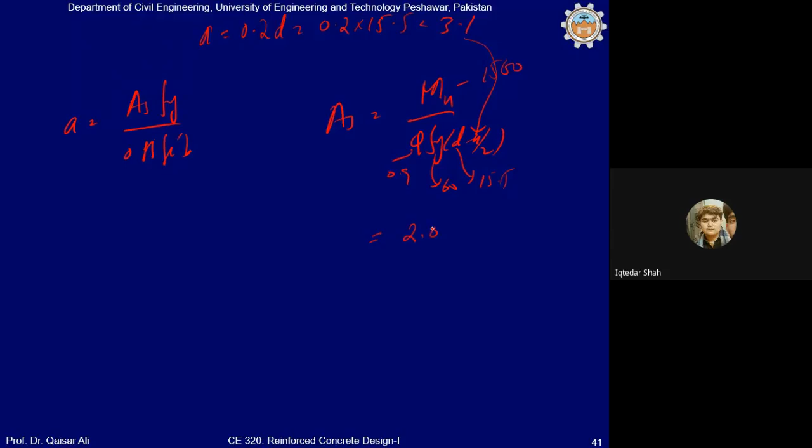What is the value? Shabash. 2.1, sir. 2.07, yes sir. 2.07, put it here and recalculate the value of A. So it will give you 4.06. Again, based on this, recalculate the value of A.

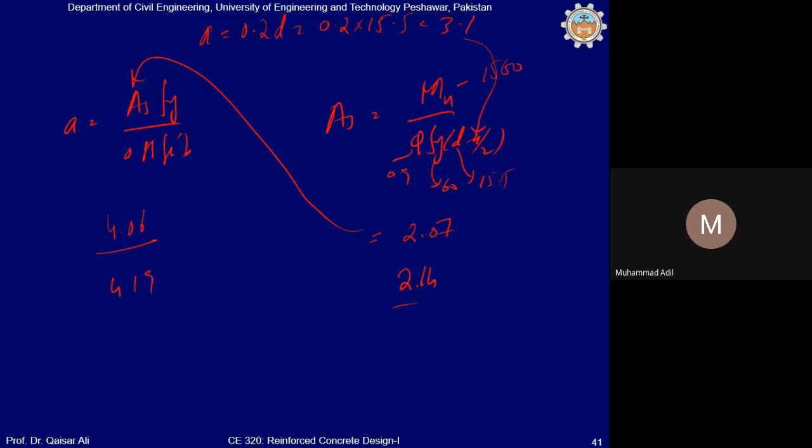2.14, sir. 2.14. Shabash. Recalculate the value of A. 4.196, 4.19. Calculate this again. 2.15. 2.15. So these values are closer.

So we will stop the trials. The design reinforcement finally for the given demand is 2.15 inch square. Okay. So the design reinforcement for the given demand is equal to 2.15 inch square.

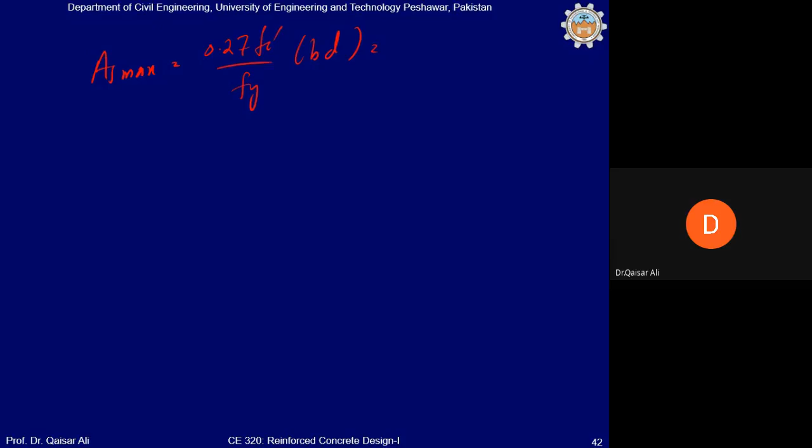Now calculate the maximum reinforcement. What will be the maximum reinforcement? Shabash, quickly. Tell me quickly. 0.27 into FC prime divided by FY into BD. Or for this you can also do it directly, if you remember, 1.35% of BD, I had told you. Okay?

What will be the value? 2.51, sir. 2.51. 2.517. Okay. So you can just round this to 2.52 inch square. And what would be the minimum reinforcement? For grade 60 and 3000 psi, if you remember, it was equal to 0.33% of BD. Or you can calculate it from 3 under root FC prime divided by FY. 0.61.

0.61 inch square. So since your design reinforcement, which is 2.15 inch square, is less than the maximum reinforcement and greater than the minimum reinforcement 0.61, the design reinforcement is okay. What does it mean? It means that if you provide this much reinforcement, the beam will fail in a ductile mode. Clear?

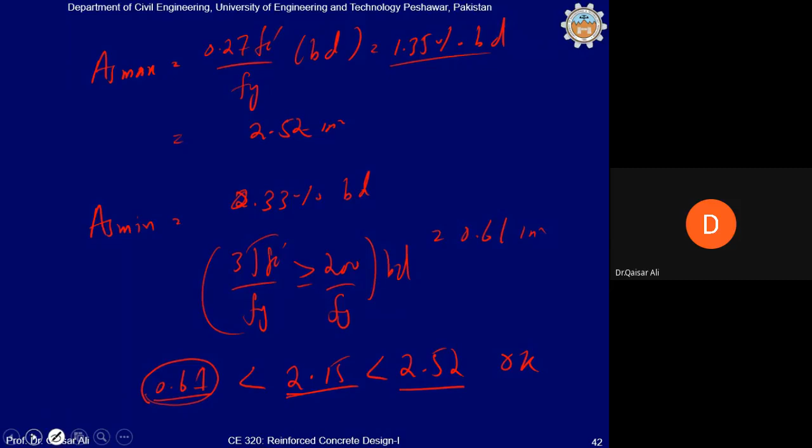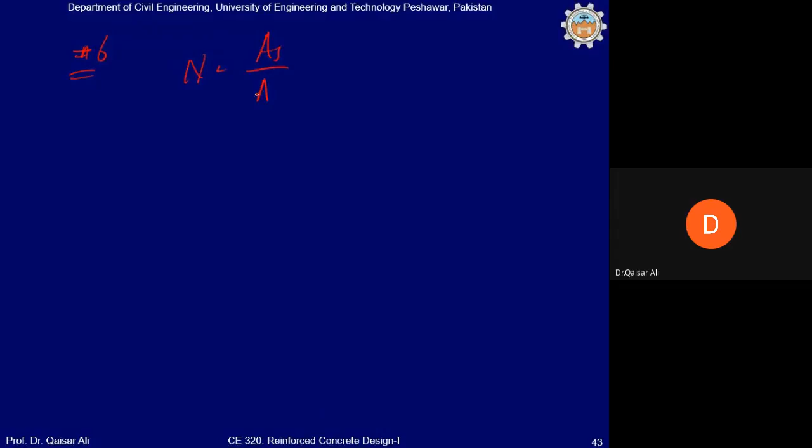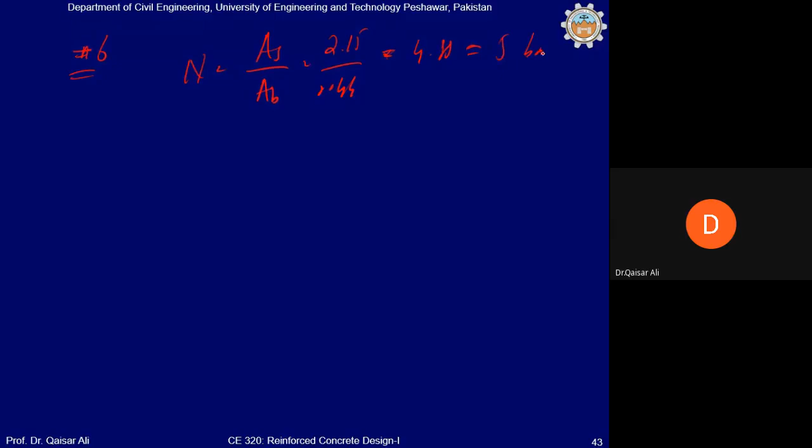Now from this you can calculate the number of bars. So for example, we are using number 6 bar. For number 6 bar, the number of bars will be equal to the total area of steel divided by the area of bar. 2.15 divided by 0.44. So how many bars will be required? 4.88, so almost 5. So almost 5 bars will be provided in the beam.

Now, if you remember, I told you that if we provide all these 5 bars in the same layer, then you have to calculate the clear spacing between these bars, because there is a limit on the clear spacing between the bars. If I take a close-up view, this is one bar, this is another bar, so this is the clear spacing between 2 bars. And what is the requirement as per code?

It should be at least the greater of 1 inch, or the diameter of bar, or 4/3 into the maximum size of aggregate. The maximum of these 3 will give you the minimum clear spacing between these two bars. Clear? The diameter of bar we have is 0.75. Usually we provide 3/4 inch down aggregate in the concrete. So 4/3 multiplied by 3/4 will be equal to 1 inch. So the minimum clear spacing should be equal to 1 inch.

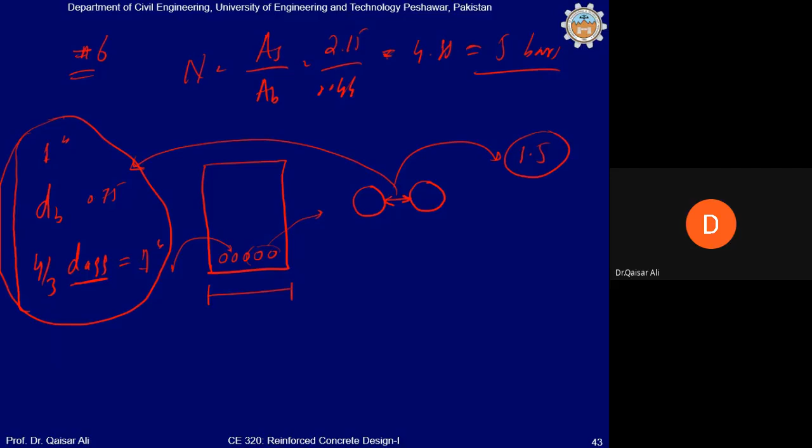But this is the code requirement. Clear? But practically we recommend that this minimum spacing shall be at least equal to 1.5 inch. Why? Because as I told you, the concrete must flow around the bars to form a perfect bond between steel and concrete. Clear? Yes, sir. Clear. So remember that you have to maintain a clear spacing of at least 1.5 inch. The code allows even 1 inch spacing, but from a practical point of view we will maintain a clear spacing of 1.5 inch between these bars.

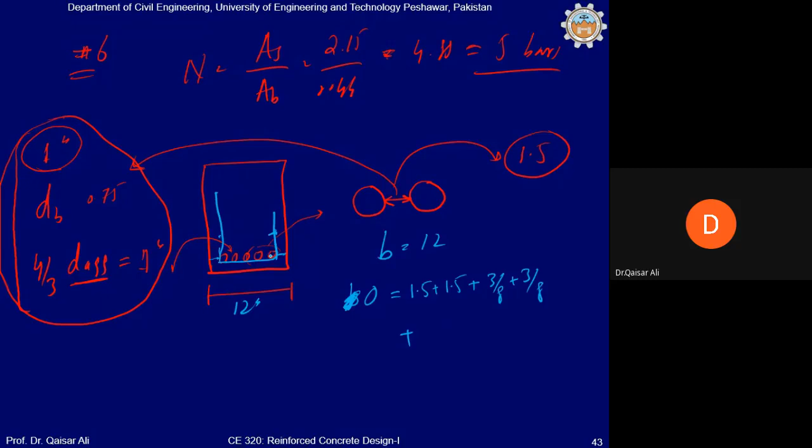Okay, how will you calculate it? Shabash. Can you hear the voice? Yes sir. Look, from here, first we have the clear cover, the concrete cover, minus 2. Clear cover, if you see, is 1.5 inch on one side and 1.5 inch on the other side, so it will be equal to this. Then if you see the stirrups, the diameter of stirrup we usually use is 3/8 inch, so 3/8 inch dia on one side and 3/8 inch dia of stirrup on the other side, plus then the space occupied by these bars, number 6 bar.